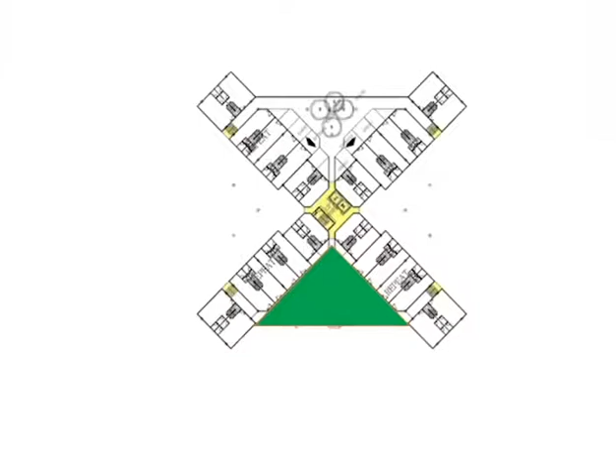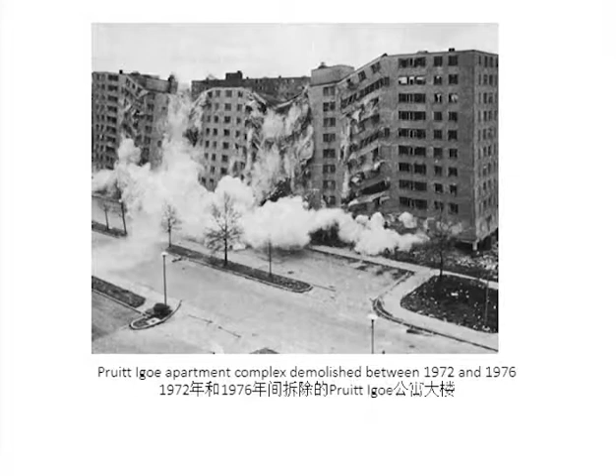When I was a student in the 1970s, experts were lining up to condemn high-rise housing. This was a time when the infamous Pruitt-Igoe high-rise apartments were being demolished. Study after study have shown that living in high-rise housing is less suited for people compared to low-rise.

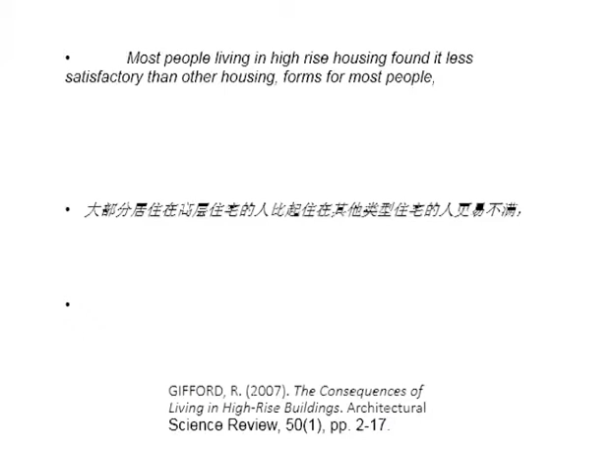A 2007 review of 129 high-rise research papers over 56 years on the human experience of tall buildings found very little evidence to support high-rise housing, particularly when it comes to children.

One suggestion is that the defects of high-rise housing spring mainly from the quality of spaces between the street and the apartment. So-called intermediate spaces, which is lamented as weird anonymous space, neither public nor private.

Indeed, high-rise housing makes necessary the provision of access from the building entrance at street level to the front door of every apartment on the upper levels of the building. Not only lifts and staircases, but also lobbies and corridors. The problem is that these spaces are neither suited for children to play in or for adults to socialize.

A recent CTBUH article suggests that articulating the threshold between the public and private domains by introducing the missing elements of the semi-private realm has long been a challenge. Failure to do so is a major drawback of the high-rise residential typology. Low-rise housing can have spaces just outside the home, front yards and streets that encourage social interaction. High-rise housing do not have them.

Architect-researcher Oscar Newman said about the same thing 40 years ago. Newman had observed that across the street from apartments that were eventually demolished at Pruitt-Igoe was an older, low-rise row-housing complex occupied by people from the same background which remained fully occupied and trouble-free throughout the decline of the high-rise.

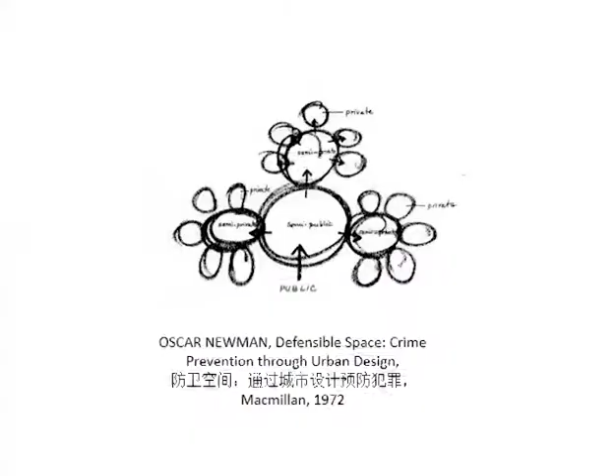Newman's theory was that it was the quality of the spaces just outside the low-rise homes compared with those outside the high-rise that made the difference. He recommended that architects design in semi-private and semi-public spaces in between the dwellings and the street.

His influence over my work of the last 10 years is pretty obvious. I try to create, through the arrangement of a private and a shared garden for each house, what Oscar Newman called defensible space, trying to humanize intermediate space, and articulating the threshold between public and private domains, albeit for low-rise.

In what I call honeycomb housing, small groups of houses are laid out around a communal courtyard like friends sitting round a table. The features of honeycomb housing compared to conventional terrace houses make it easier for parents to allow their children to play outside their homes, encourage neighbors to know and interact with each other, and perhaps even promote helping behavior.

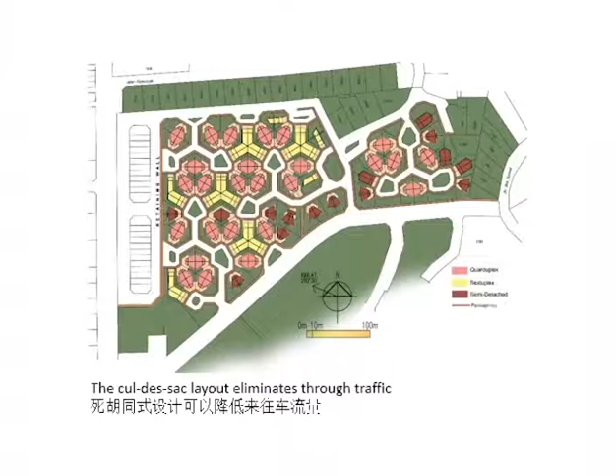Compared to conventional terrace house grid layout, the honeycomb cul-de-sac layout reduced the amount of land taken up by roads and increased the area available for private and shared gardens. This cost-saving feature has certainly helped to put the honeycomb idea into practice. Can we now do something similar for high-rise apartments?

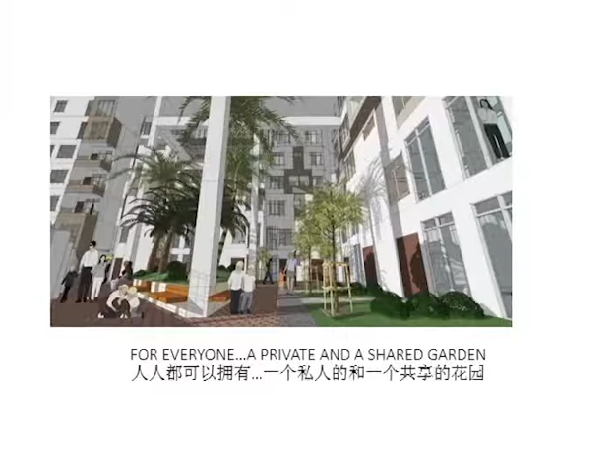In this new high-rise idea, I call it the Sky Neighborhood concept. Every resident can step out of her main door to her front yard and beyond that a landscape courtyard or sky court with a garden fence at the edge. The doors lining the courtyard are the front doors to the apartments.

All apartments in this neighborhood in the sky will have such doors, leading into a lofty 6-story high sky court which contains private and shared gardens. I'm sure you're wondering, how do the floors above the courtyard level, and there are 5 of them, get their access to their own 6-story sky court?

Will the cost of providing this lavish-looking green courtyard in the sky be exorbitant? Let's begin with the first question. How is it done?

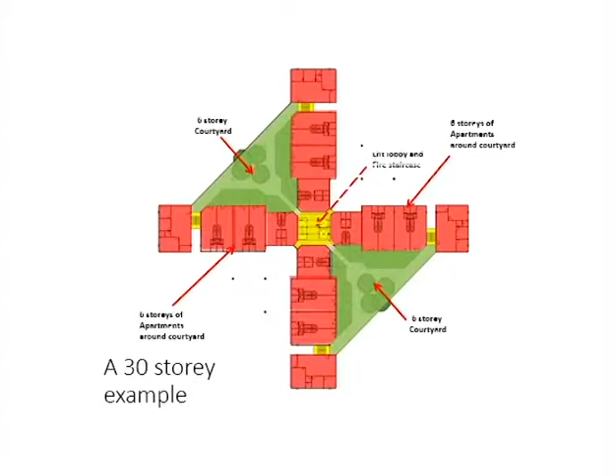This slide explains the problem to be solved. These are 2 sky courts on the same floor. To be 6 stories high, they have to be flanked by 6 stories of apartments. There has to be a central lobby with lifts and a firefighting staircase, and escape staircases. How indeed can each one of the 6 stories of apartments get direct access to a sky court?

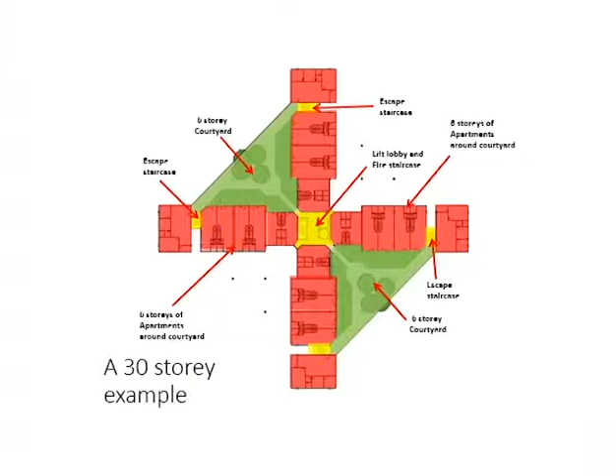Let's look at a portion of this plan to a basic module. The basic module in this layout comprises 2 double-story apartments which occupy 3 floors, one placed on the top of each other, such that access to both apartment units are on the courtyard level, with one unit connected to another floor above the courtyard level, and the other apartment joined to the floor below the courtyard level.

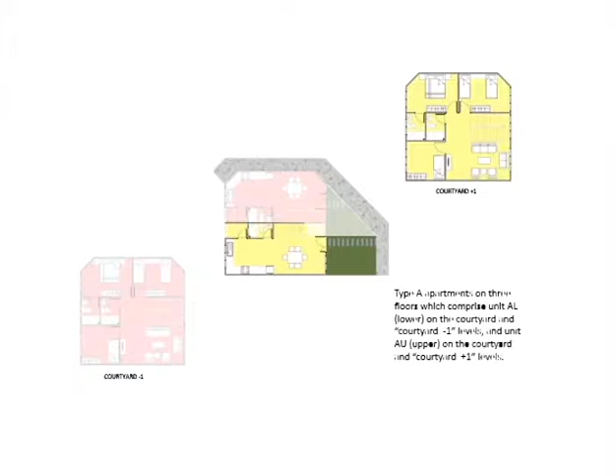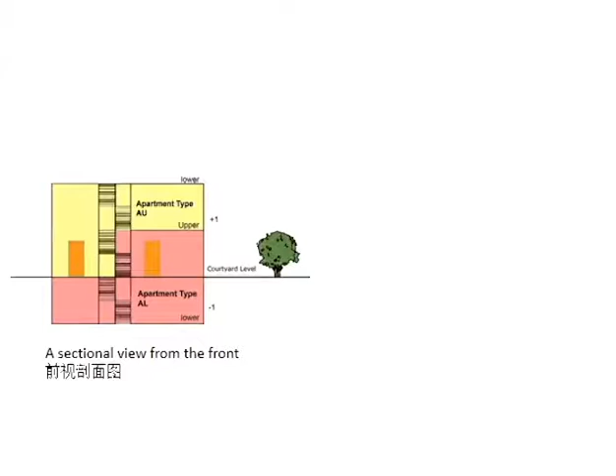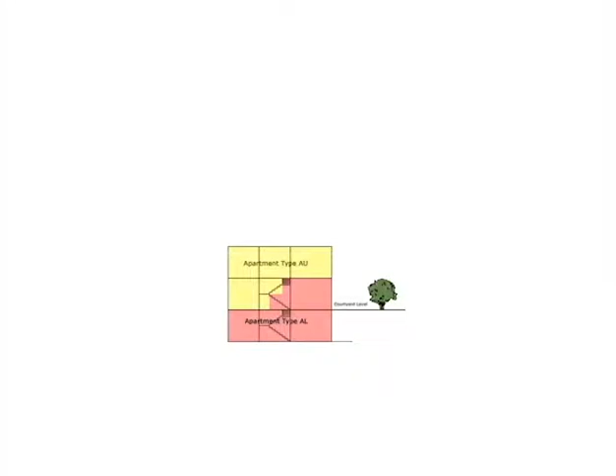This is looking at the pair of apartments from the front. As you can see, the pair of 2-story apartments take up 3 floors, but both can be accessed from the courtyard level. This is the same pair of apartments, but looking at them from the side. Stacking 2 pairs of these interlocking apartments on top of each other produces a 3 stories high sky court.

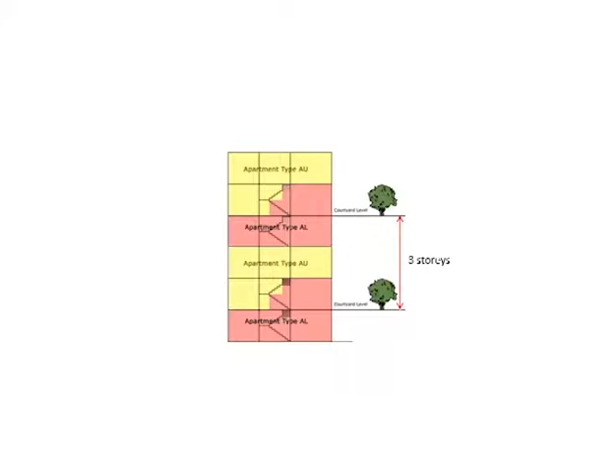However, stacking these apartments on top of each other such that the courtyards flip from one side to the opposite side produces a 6-story high sky court.

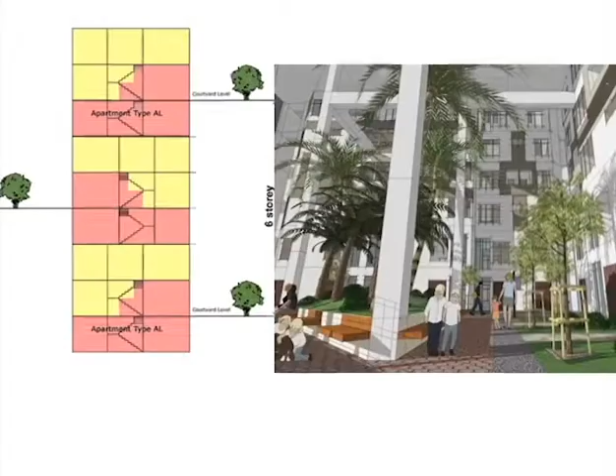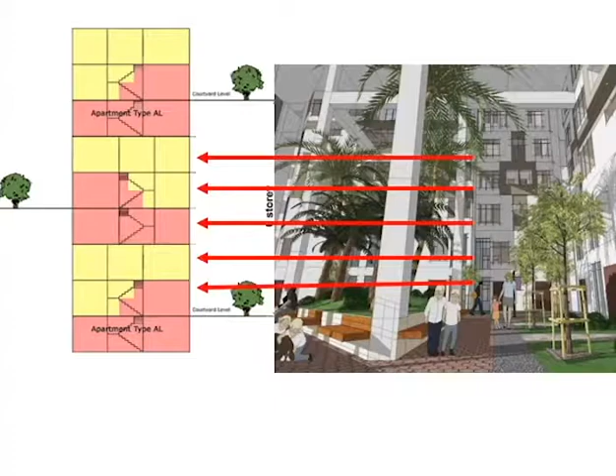This slide shows how each floor in the 6-story high sky court can open out onto its own shared and private gardens. The first floor above the courtyard level is part of a unit which is on the same level as the courtyard. The 2nd and 4th floors are both linked to the 3rd floor, where there is another courtyard which is hidden from view. The 5th floor is linked to the courtyard 1 floor above it.

In equatorial Malaysia, the blocks are best aligned north, south, east and west, such that all the 4 sky courts would get some sunlight. This design thus allows in plenty of light and ventilation, but provides cover from direct rainfall. Each and every resident in this new type of apartment can be afforded with a shared and private garden. So the features of the low-rise honeycomb housing have now been replicated for high-rise.

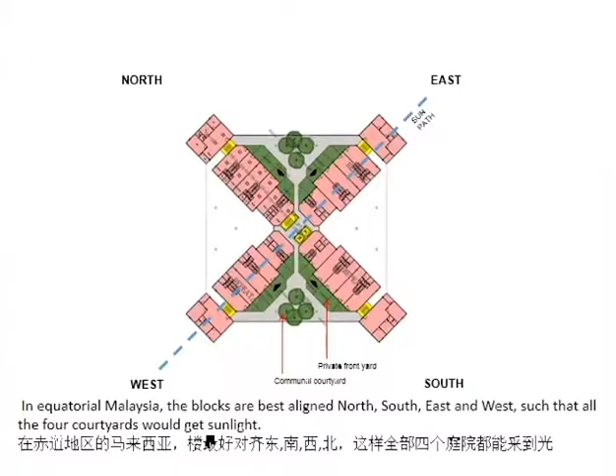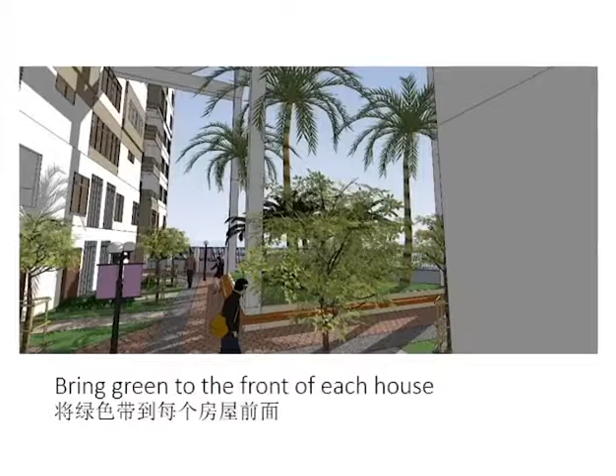Before we go on to the cost aspect, I'd like to dwell on why we would want to have such an arrangement in the first place. Each and every resident in this new type of apartment can have a shared and a private garden. There is sufficient space and light to allow trees to be planted just outside your high-rise home. As a resident, you share a communal courtyard with a small number of households, making it easy for neighbors to get to know and interact with each other.

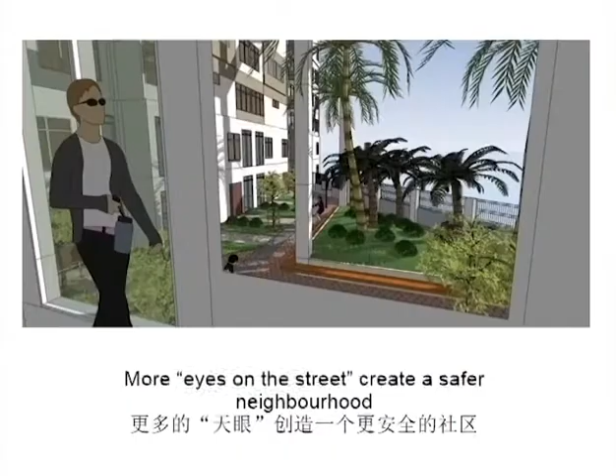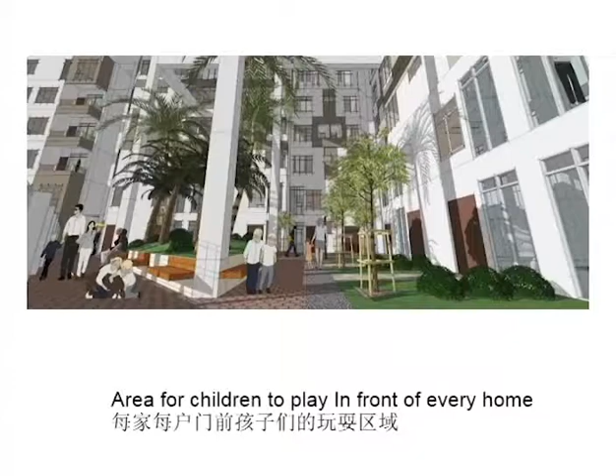The private gardens serve as a buffer between the communal sky court garden and the apartment front doors and windows, an arrangement that mimics the front yards of low-rise homes. With many eyes overlooking the sky court, along with safety measures such as a garden fence at the edge of the sky court and child barriers at strategic locations, the sky court can be made safe for children so that high-rise can be suitable for families.

So on to question 2. Will the cost of this new type of apartment be exorbitant, making it suitable only for the high-end market? To answer this question, we designed a 30-story prototype so that it can be compared with other types of apartments, and I'll explain how the new concept provides for circulation more efficiently.

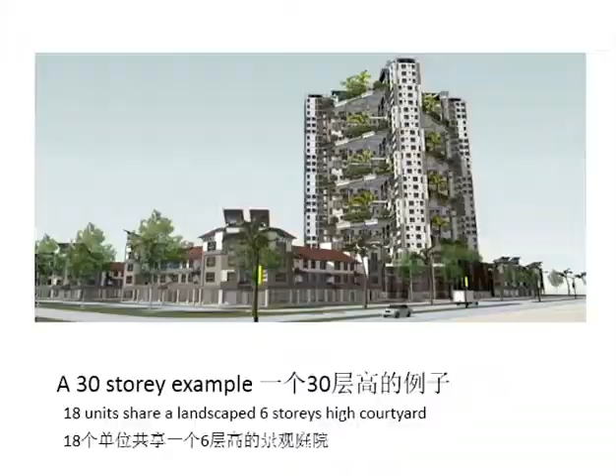In this design prototype, apartments face landscaped 6-story high sky courts. 274 apartment units are served by 16 sky courts, each sky courtyard typically consisting of 18 apartments. On the ground floor of the podium block are the entrance lobby, shops and the service and utility rooms. On the 1st to 3rd floors are car parks. On the podium are 18 apartments, community and prayer halls and a bigger green area.

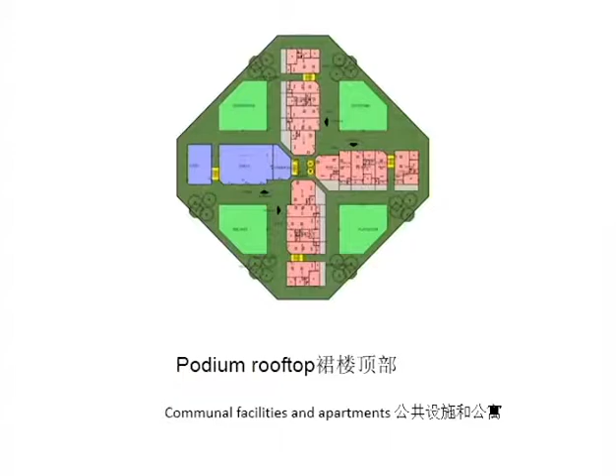The apartments, mainly duplex units, are arranged in an X form with pairs of courtyards that swing from one side to the other on every 3 floors. These are the floor plans of the apartments facing east and west. And these are the floor plans for the apartments facing north and south.

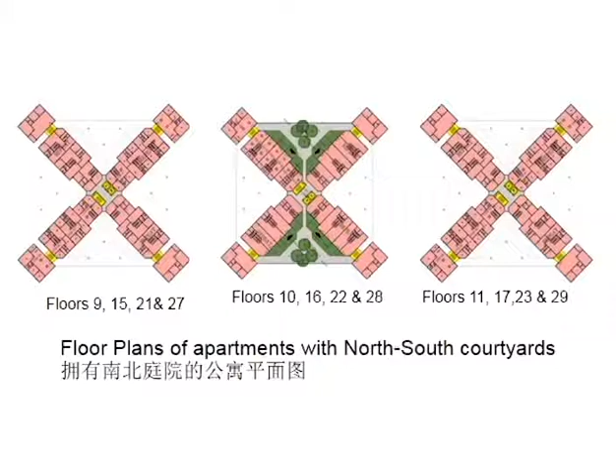Space usage was divided into 5 categories: apartment interior, apartment external area, the shared sky court area, circulation space, and services. The assessment is that of a typical courtyard and the 3 stories of apartments that are accessed from it. It shows that with the Sky neighborhood, the circulation space is only 4.32% of the total area served by it. The percentage of circulation space plus services added in is only 5.1%. This is a remarkably low figure.

To appreciate this fact, let's now compare it with some examples of high-rise apartments with conventional and less conventional layouts. We can categorize existing high-rise apartment layouts by the method of access to each apartment: single or double loading corridors for slab blocks, and central lobbies for tower blocks, and so on. We selected examples of the common and not so common topologies, analyzed their usage of space in the same way that we did for the Sky neighborhood example, and tabulated the results.

This plan shows the apartment block at Woodlands Drive 41 in Singapore with a single loading corridor. This arrangement is not very efficient. Circulation here takes up a considerable 18.8% of the total floor area.

Apartments with a central loading corridor are more efficient, serving apartments on 2 rows along it. However, compared with a single loading corridor, ventilation and light are not so good. This is a view of Puri apartments in Puchong, Selangor with a double loading corridor. Here, circulation makes up 16.03% of the total floor area.

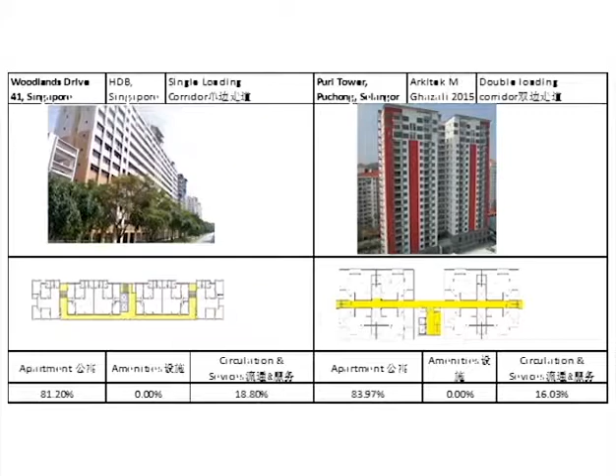Here, the efficient arrangement of circulation space is offset by the rather inefficient sharing of lifts by a small number of housing units. In this tower block, circulation takes up 11.9% of the floor area. The lifts only serve 7 units on this floor.

The scissors corridor was introduced by Le Corbusier in Unité d'Habitation in Marseille. Here, internal double loading corridors serve 2 rows of duplexes positioned opposite each other in an interlocking arrangement. These corridors are only required to serve every 3 floors. The percentage of floor space taken up by the central corridor is very low at only 8.12% for the 3 floors served by the corridor.

The skip-stop lifts need only stop on 1 floor and skip the other 2. That 1 stop serves 58 units. This is an extremely efficient layout and is not more common, perhaps because the corridor in this type of layout is so long and narrow and has no windows. The apartment units as well are long and narrow. Still, it's a clever layout that efficiently deploys circulation space and lifts.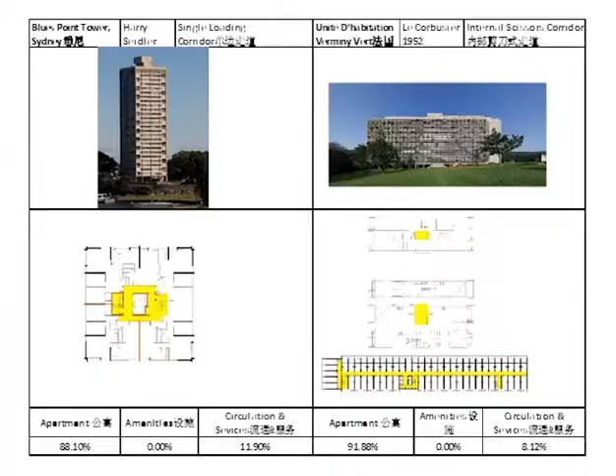In the 1970s, Alison and Peter Smithson developed an improvement on the scissors corridor layout concept by having a single loading external corridor. Here, the quality of the access corridor is much improved. The wide, well-ventilated access external corridors were promoted as streets in the air. Here, the circulation space was not as efficient as Unité d'Habitation, but was still good at 12.58%.

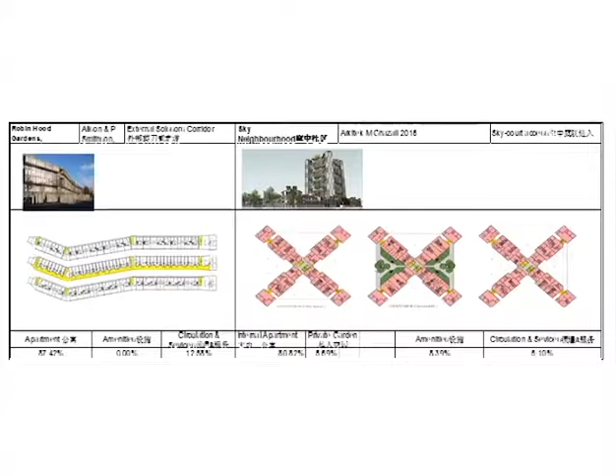This table shows the 5 examples of conventional layout plans and compares them with the Sky neighborhood design, where the circulation spaces, including any corridors and services, occupy less than 5.1%. In contrast, the circulation space for conventional apartments ranges from 8.12% to 18.8%. Indeed, circulation space in the Sky neighborhood design is minimized to less than any existing type of apartment.

The sellable apartment space, inclusive of the respective private courtyards, is about 86.5% of the available space. This compares with the sellable apartment area making up about 81 to 88% of the total area in the conventional apartments and 92% for Unité d'Habitation. Even after adding in the communal courtyard space to circulation space, the total at 13.5% is lower than the circulation space in the majority of conventional apartments.

This very substantial efficiency improvement is all the more remarkable because it is achieved by making the apartment design more attractive, not less, by extending the benefits of having a landscaped sky court to every apartment. Indeed, the introduction of sky courts is the key.

However, the comparisons done in this study only took account of the typical floor plans. They did not take into account the area breakdown of the whole tower block. As such, any amenities for social use found on the ground floors or on intermediate floors of the blocks were not taken into account.

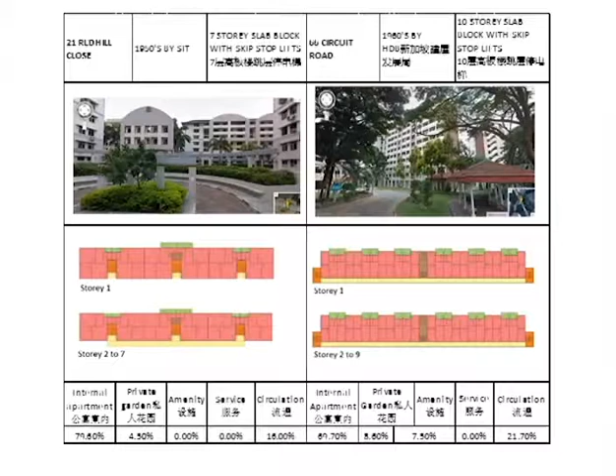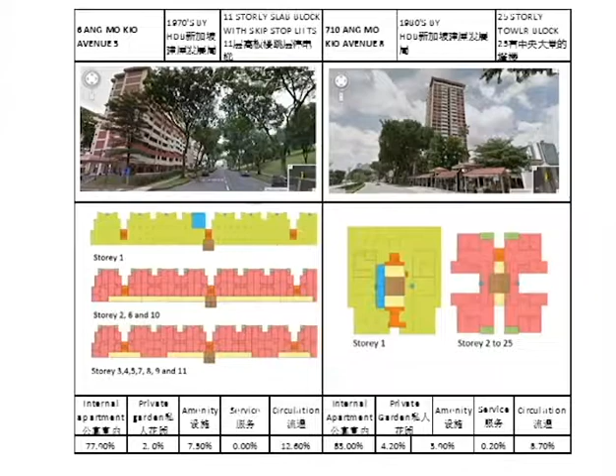We decided to choose apartments with at least one of the following layout features: slab blocks with single loading corridor without a void deck, single loading corridors with ground floor void decks and skip-stop lifts, tower blocks with ground floor void decks and central lobbies, cluster blocks with ground floor void decks, and blocks which have ground floor decks and sky terraces in the upper floors.

This table shows the 7 Singapore examples and compares them with the Sky neighbourhood design. The circulation space for conventional apartments ranges from 8.7% to 20.4%, but circulation space in the Sky neighbourhood design is minimized to only 4.8%. Among the 7 comparators, the amenities area ranges from 0 to 7.5%, compared to 11.05% for the Sky neighbourhood. The sellable apartment space, inclusive of the respective private courtyards for the new prototype, is about 84.1%. It compares with the sellable apartment area making up about 71.6% to 87.2% of the total area for the comparators.

Among the Singapore examples, the most efficient layout is 710 Ang Mo Kio Avenue 8. The internal apartment area made up 83% of the total built-up area. Together with the private balconies, the sellable area came up to 87.3%. The amount of circulation is also especially low at 8.7%. This is a very leanly designed tower block where the 4 apartments on each floor have doors opening directly into a central lift lobby. On top of this, the whole block is serviced by only a single escape staircase.

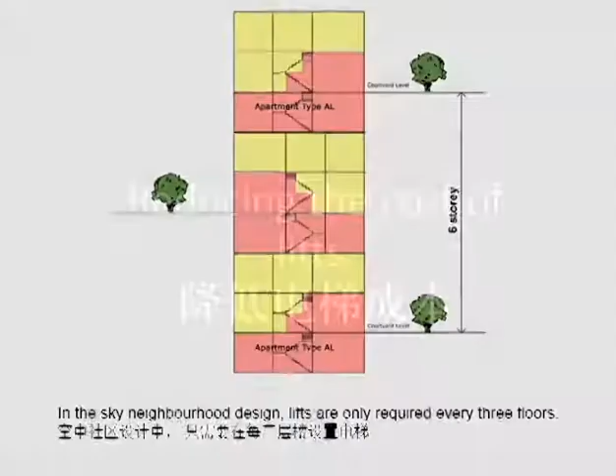In the early Singapore examples, skip-stop lifts were adopted to save costs. The savings on the cost of the lift doors play the smaller part. The main savings come from having lifts that travel faster between stops, reducing waiting time, or else the number of lifts that are needed. The lifts in this Sky neighbourhood model only need to stop every 3 floors at the courtyard levels, but residents don't need to go up or down from the floors with lift stops to go to their own apartment like the Singapore examples. From the entrance level of each apartment, residents walk straight to their homes. They only walk 1 floor up or 1 floor down to get to their bedrooms.

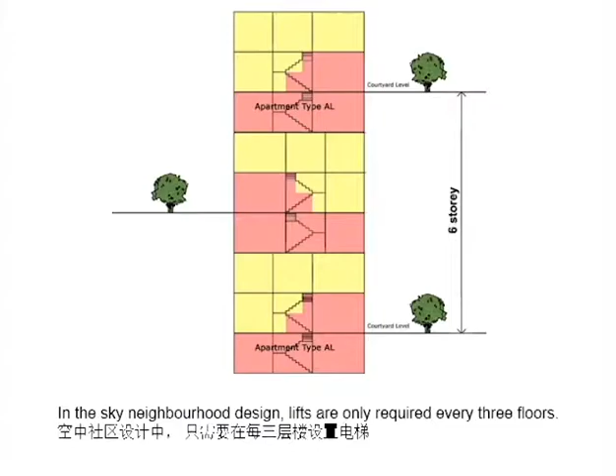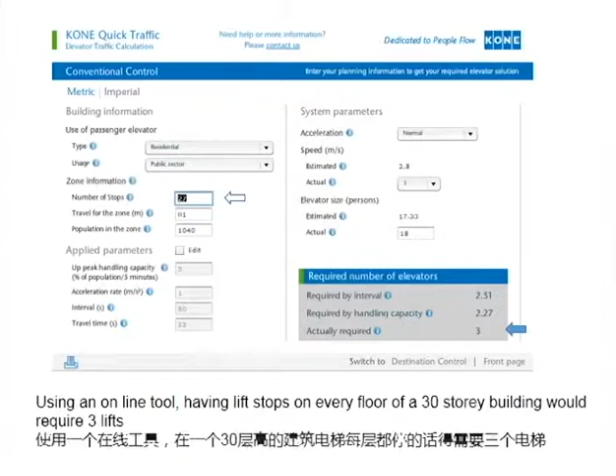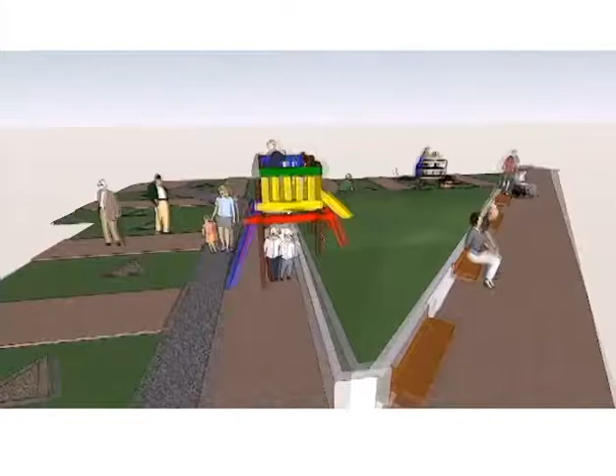We used an online calculator provided by Kone on the design prototype. When we entered lift stops at every one of the 27 residential floors, the calculator estimated that 3 lifts were needed. However, when we entered the actual lift stops required, which is 9 stops, the calculator estimated that only 2 lifts were needed. I believe that the Sky Neighbourhood's apartment typology can be a new approach that goes to the heart of the problem with high-rise. To solve the problem of circulation and intermediate spaces in high-rise apartments, corridors are replaced with spacious skycourts, and by the way, it also gets the lifts to work more efficiently.

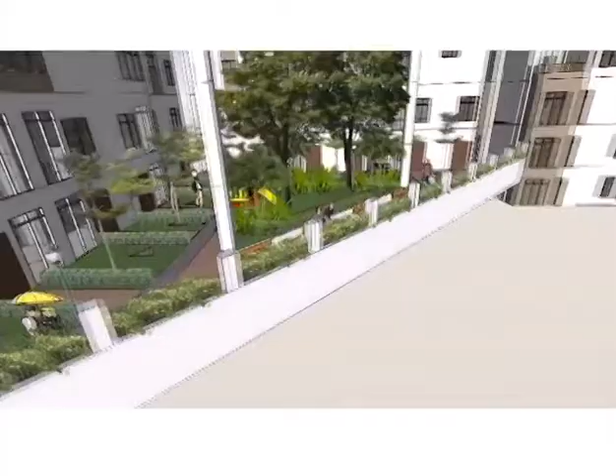Yes, extra costs will certainly be incurred to construct and landscape the 6-story high skycourts. However, savings arising from totally eliminating corridors and reducing lift stops can claw back much of the extra costs. Then there is the cost of land, which in city centre development can far exceed the cost of construction. Our 30-story building on a small site of 0.6 hectares yields a plot ratio of 4.9 and a density of 358 units per hectare, which is 40% higher than the current planning standard in Malaysia. If planning authorities can accept the argument that high-rise housing can be socially acceptable, then they might be persuaded to approve this higher density.

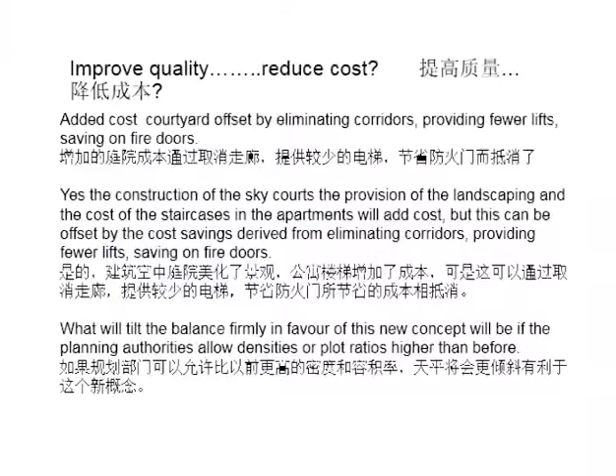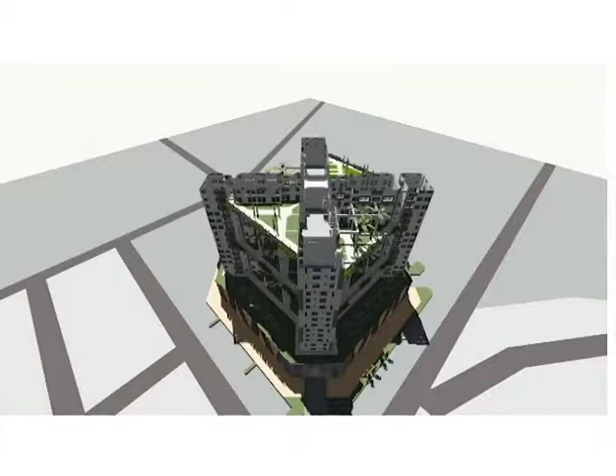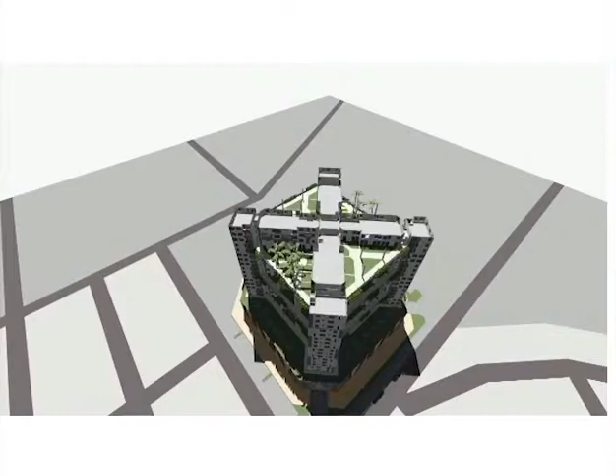The very reason for high-rise housing is the exorbitant cost of land in urban centres. Permission to build to a higher plot ratio would contribute to savings on land cost. In situations where the construction cost is equal to the cost of land, a 40% increase in net plot ratio is equivalent to a 40% decrease in the construction cost of sellable net built-up area. If, as we stack more apartments on top of each other to go higher up, we also add more gardens and parks, creating villages in the sky, then the social problems of high-rise can be overcome. Being able to double or triple livable space from the scarce and expensive urban land would help make it more affordable for housing. Eliminating corridors and instead creating village greens just outside every apartment offers the prospect of improving both the quality and affordability of high-rise housing.